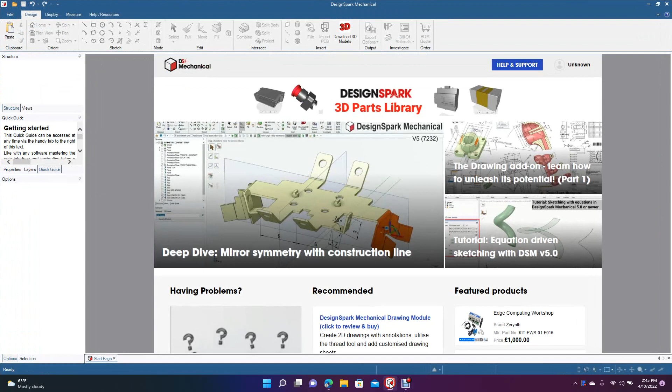Okay, we'll go ahead and open up DesignSpark. We're going to create a new design. You can follow along if you want to make one of these yourself. We're going to go to DesignSpark Options. Going to navigate over to Units, and we're going to make sure this is on millimeters, and it is. So we'll go OK, and then we'll change this to plan view.

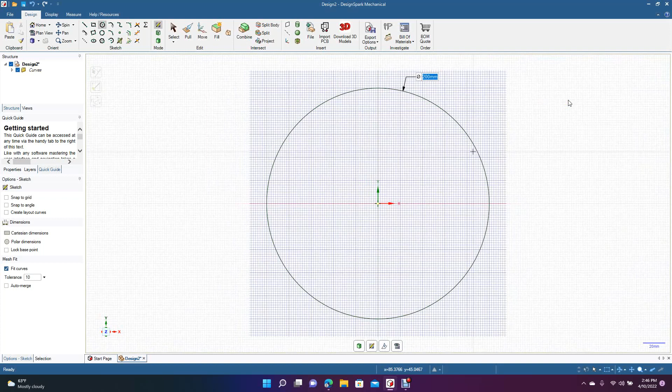I have some basic dimensions on my phone that I will be using. So the first dimension we want to create is a round circle of 200 millimeter. So we're going to go ahead and get our circle tool. We'll drag out and we'll type in 200. Control minus. Alright, it looks like the next dimension for the cylinder in the middle is going to be 78. So we'll go ahead and get the circle tool again, and we'll type in 78.

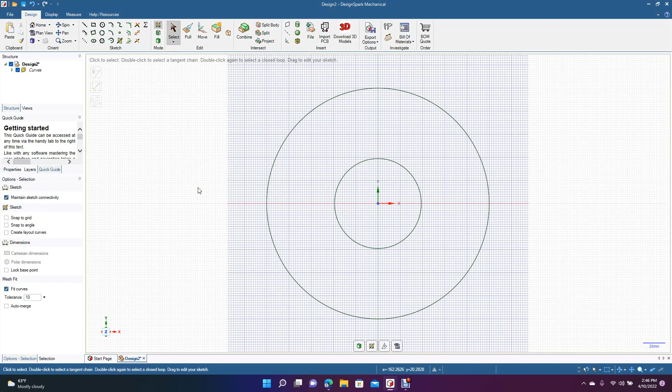Okay. Now we're going to go ahead and put the thickness on there, which is going to be 56. So we'll draw one more cylinder, and we'll type in 56. Okay. So now what we want to do is go ahead and go to the 3D mode. We want to spin this. The dimension in the inside to hold the filament is going to be 64 millimeters.

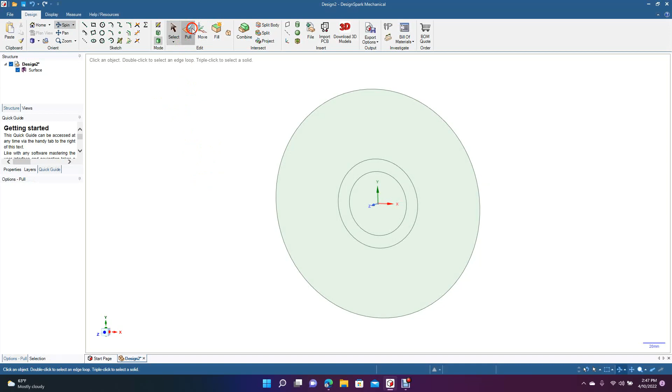So basically, we're going to pull this. Let's see here, how I want to do this. We'll go ahead and move this. So we'll go to move, and then we'll move this and type in 64 millimeters, enter. Okay.

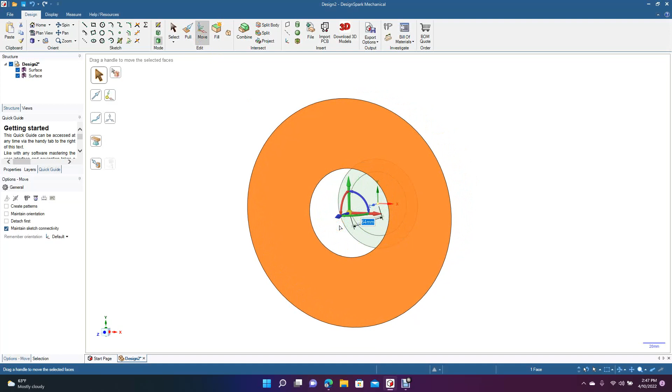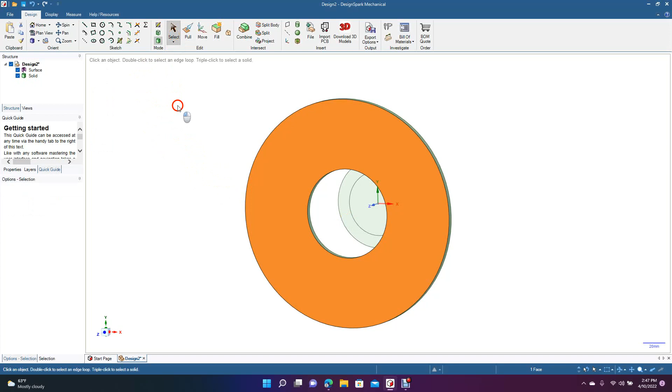Now we're going to add a little bit of thickness to this, so we'll pull, and then we're going to go ahead and add, I think probably 5 millimeters will be good. Okay. Now we're going to go ahead and spin this around. Let's go ahead and get rid of the center one. That's going to be where our filament is.

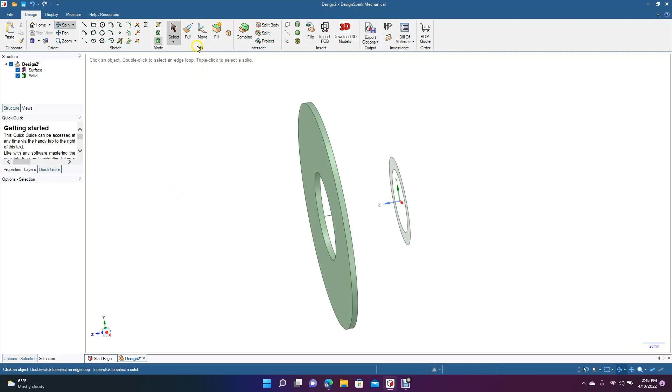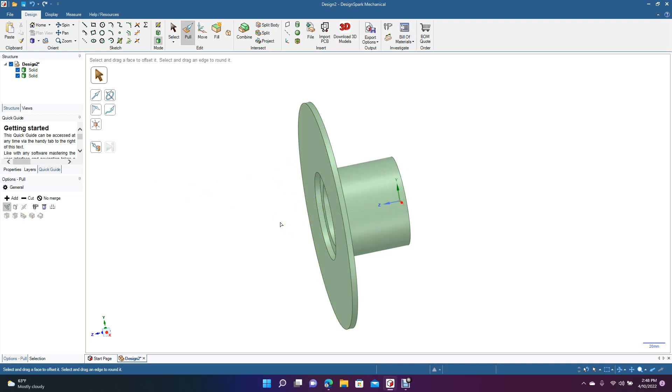Okay, now we're going to go ahead and move this. Actually, we can pull that, so let's go ahead and pull. We're going to select that piece, and we're going to pull to there, or actually up to here. Let's undo that. Go ahead and pull. We'll pull to the point. We'll go up to here. All right. It's going to be our inside of the wheel.

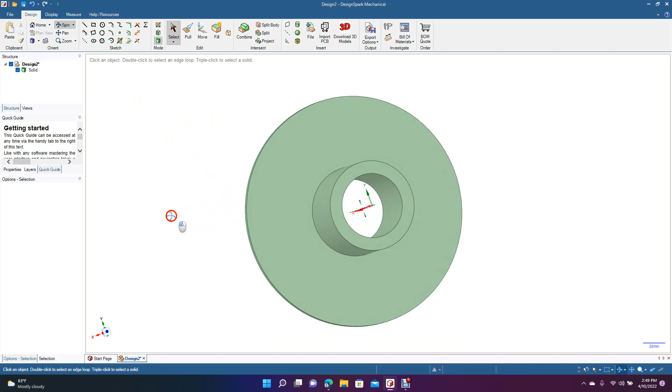Okay, now we're going to go ahead and do the same out here, so we'll select this. Actually, you know what? Let's just spin this around and go ahead and put another piece on there. Go ahead and click that. We'll click here. Go to plan view. We'll grab our circle tool. And we'll type in 200. And we'll go ahead and spin this.

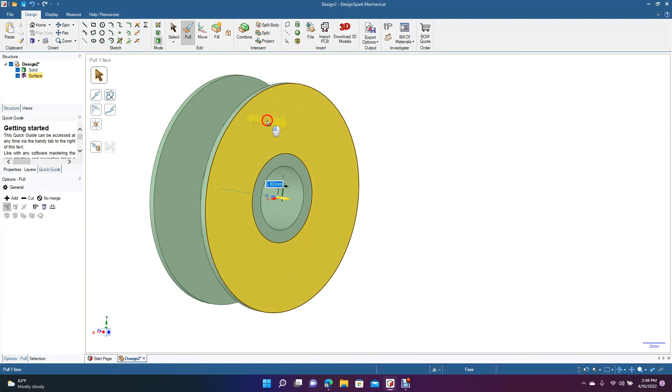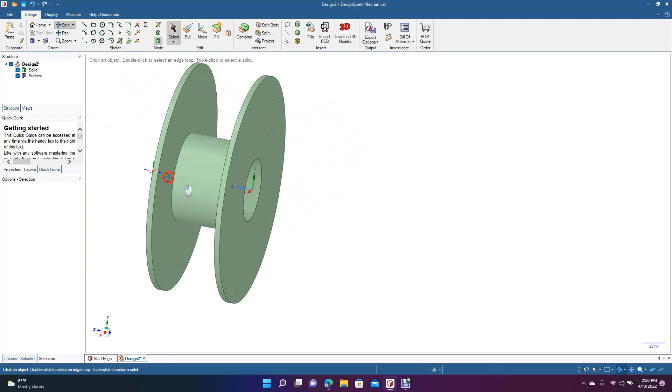Go to pull. And we're going to go ahead and pull this 5 millimeters. So undo, let's click there, type 5. Actually type -5. Okay. So now we have the basic wheel that our filament's going to go onto. So we'll go ahead and spin that around. We'll click this face here and we'll go plan view. And then we're going to pan this over.

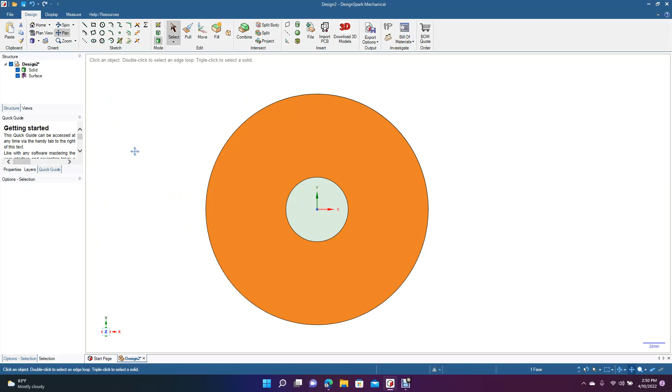Okay, now we're going to put some squares in there, I guess. 1, 2, 3, 4, 5. We'll go ahead and put 5. So let's go ahead and get our line tool. Going to go from the top there to right there. We'll select to click off. Now we're going to go ahead and go right mouse click, set as mirror.

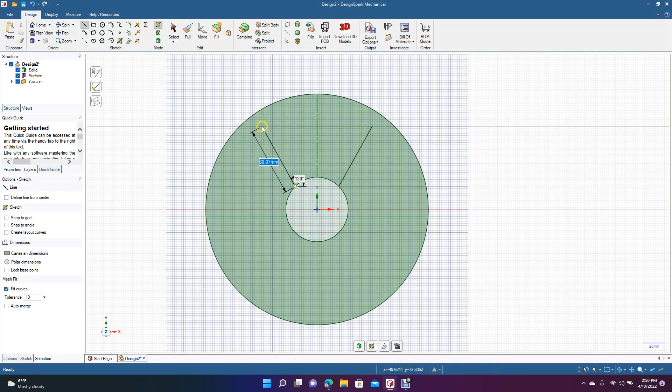Now we're going to go ahead and draw one of these mirrors over here. It's going to be 57.5 millimeters. Let's just make it 57. And then it's going to be 119.3 degrees. So we'll go ahead and click off of it there. Now we're going to grab our offset curve. Click on that line. We're going to come down here. Let's just come all the way down to 17 millimeters. So type in 17.

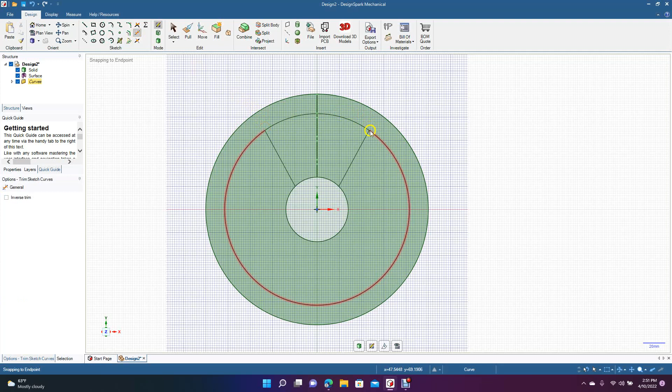Okay. Now we're going to go ahead and get our trim away tool. Let's trim away these little pieces here. Okay, let's get that piece. We don't need that anymore. Now we're going to go ahead and get our create rounded corners. We'll put a fillet in there. 10 millimeter. We'll put one here. 10.

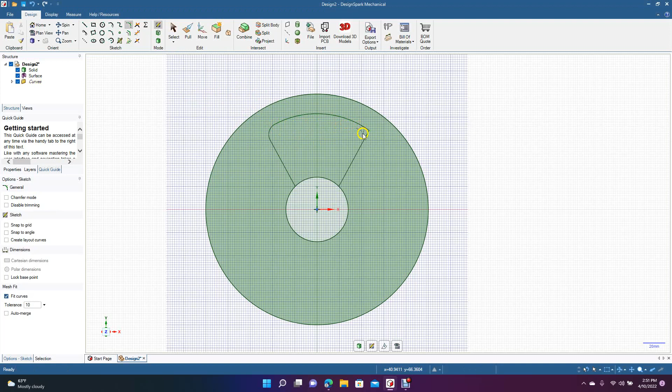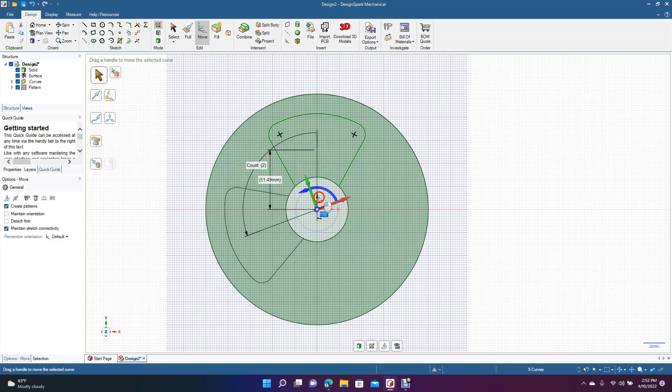Okay, now we're going to go ahead and select these pieces. We're going to click on move, and then we're going to come over here to create pattern. Then we're going to drag this little move tool to the middle, and then we're going to flip this around till we have, we could go up to 4. So we're going to go 4 there.

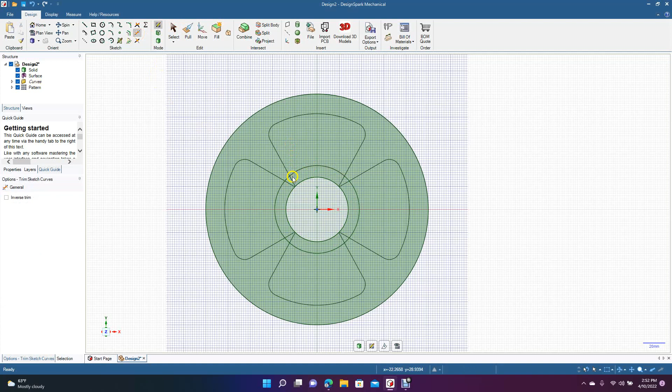Now we're going to go to the offset again. We're going to offset this up. Let's just go ahead and offset it 10 millimeters. All right, let's get our trim away. Trim away all these pieces here that we don't need. Okay, that looks pretty good for the filament holder. Now we're going to go ahead and get our create rounded corners, and we're going to put a little fillet in there. Let's do a 5 millimeter one, and then we'll follow that through on the rest of these.

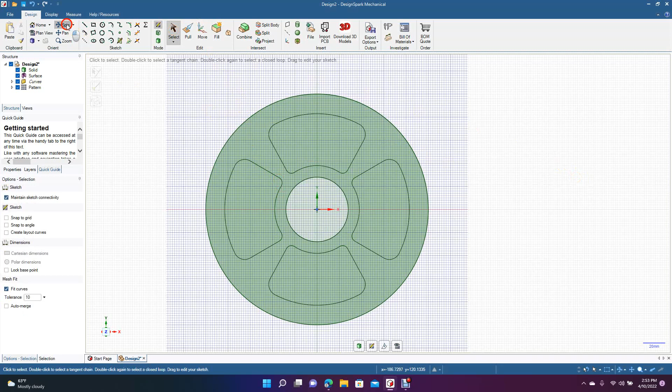Okay, we're almost done here. Okay, this is going to be our basic filament wheel. So now we're going to go ahead and spin this. We need these to be hollow. So we're going to go ahead and pull.

We're going to hold down the control key to select all of these. And then we're going to pull straight back so it goes through. And then we're going to go ahead and spin that. Looks like a decent filament wheel.

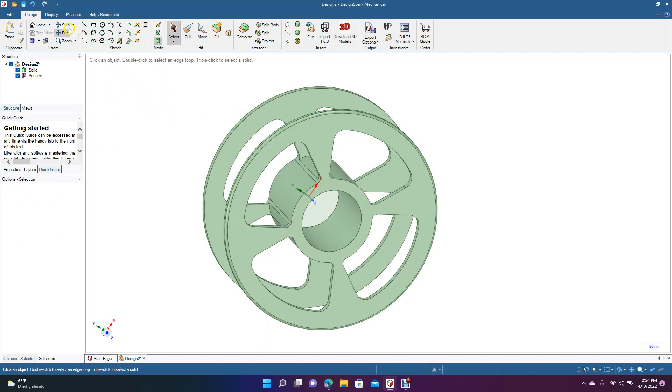Alright, the only other thing we're going to do is go ahead and click the outside there. We're going to add our, let's go undo, let's click that, let's add a 2 millimeter fillet. Okay, we're going to go ahead and spin that around. Let's go ahead and click there and add a 2 millimeter fillet. We're going to keep the insides here flat.

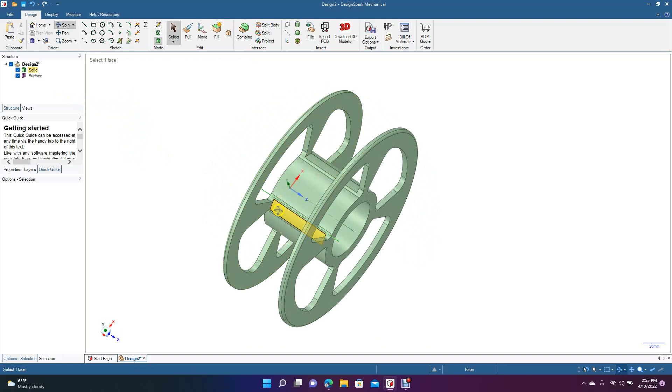The only thing I'm not crazy about is how this got kind of gouged out there. So what we're going to do to fix that, we're going to go ahead and rotate that. We're going to select here, click on plan view. We're going to grab the circle and we're going to come up a little bit to, I think it says 60, I can't really tell what it says. 87, so we'll go 88 millimeters.

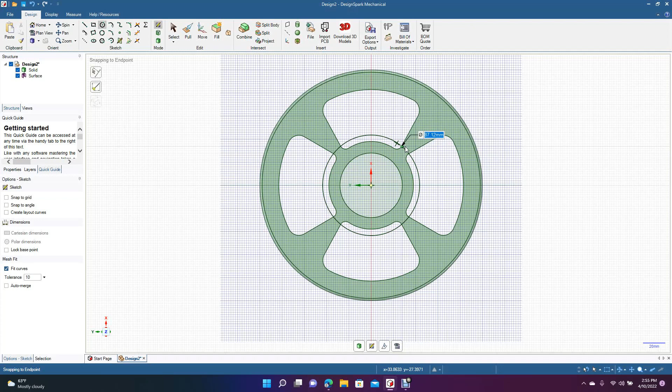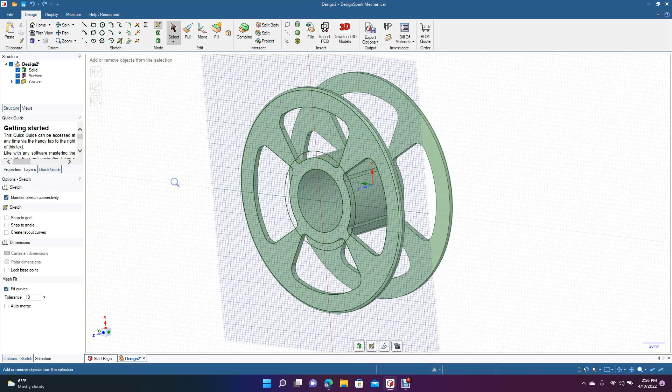Spin this. Now we're going to go ahead and pull. Select these. Pull, let's go up to here. Spin that, make sure that's still got that gouge out of there. So let's just undo that. I'm going to go ahead and keep it like this. Let's go to the 3D mode. Oh, this is good enough. Filament's just going to go inside of there anyways, wrap around.

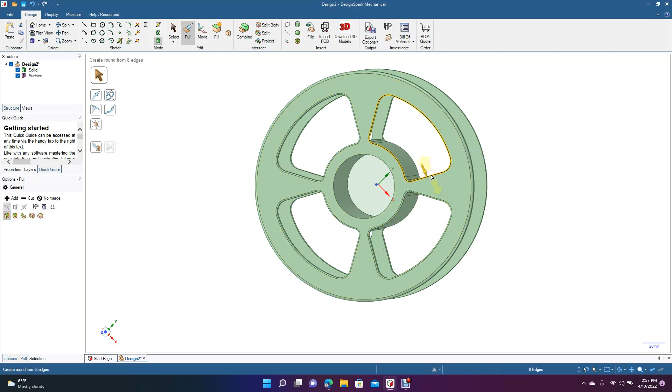Okay, so we added our 2 fillets to the outside. And now what I'm going to do is go ahead and get the pull tool. Click till everything's selected, type 1. We're going to put a 1 millimeter fillet in all this. Type 1. Okay, we'll get the front and the back. Okay. Go ahead and get there. Let's type 2 on that one.

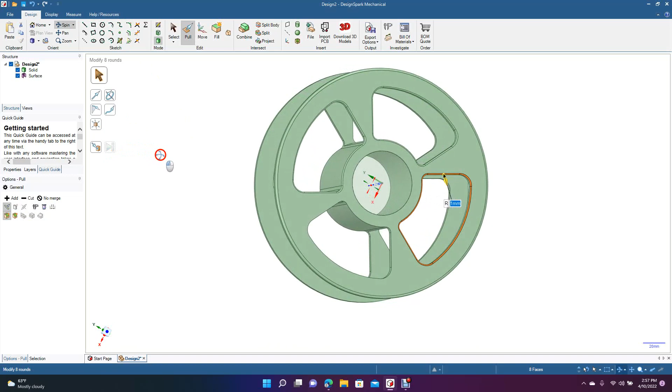Okay, let's spin that around. Let's do the same on here. Pull. Click till everything's selected. Type 1. Do it on the rest of this for 1 millimeter. Okay, this looks like it already has the 1 millimeter on there. Actually, it doesn't, so let's go ahead and pull. Type 1. Let's click this circle here and type 2. Let's go ahead and undo that.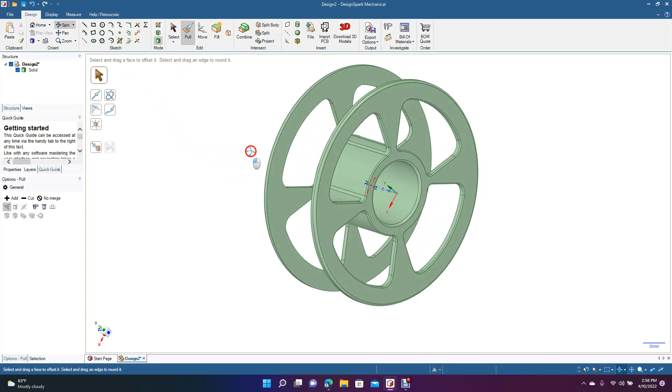Okay, we have a little piece here we need to get rid of, so let's go ahead and get rid of that. Let's pull there, type 1 or 2. Okay, that's better. Spin this around to the back side, that looks pretty good. Okay, that looks like that's going to be good. That's going to end today's tutorial. That's going to be our filament holder.

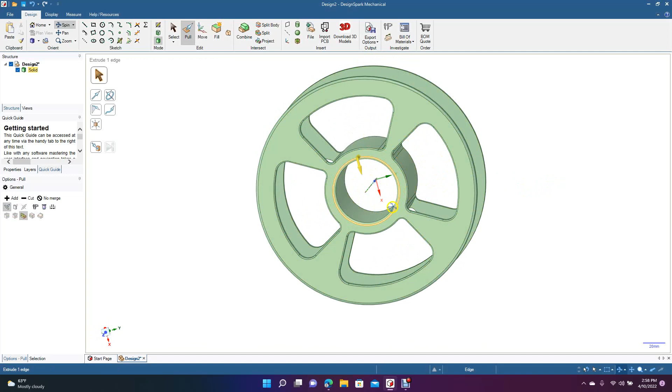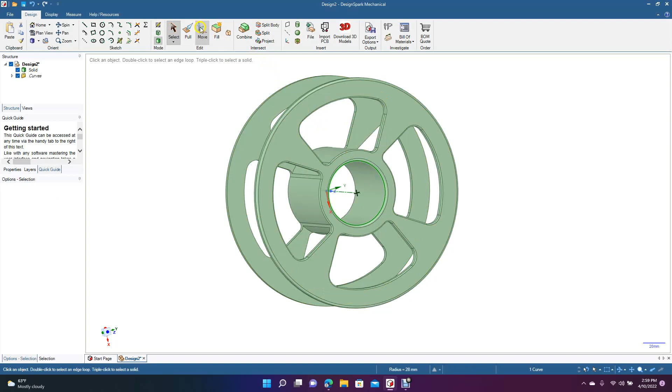What you also could do is create a plug here if you have a smaller hole and you want this to fit in the middle. We can go ahead and create a plug that goes there. So to do that, we just want to click this piece, do a Control-C, Control-V. And then we want to move that, grab the blue arrow, drag that out a little bit. Then we want to fill it.

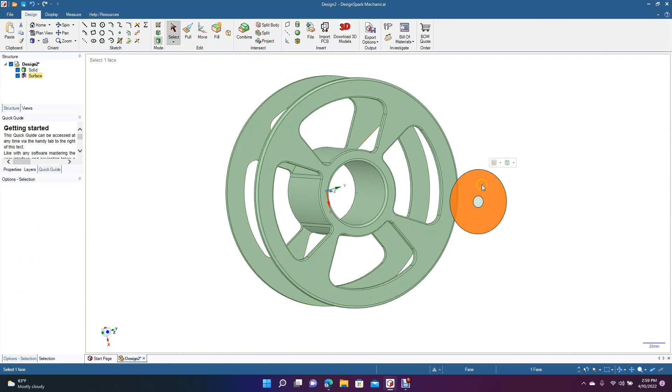And then go ahead and put a smaller circle in there, maybe 10 millimeters. Okay. And then go ahead and go back to your 3D mode. Let's go ahead and give this some thickness. Let's pull. Let's do a 35 millimeter plug there. So that's basically going to fit in there. Then your screw will go right through the middle.

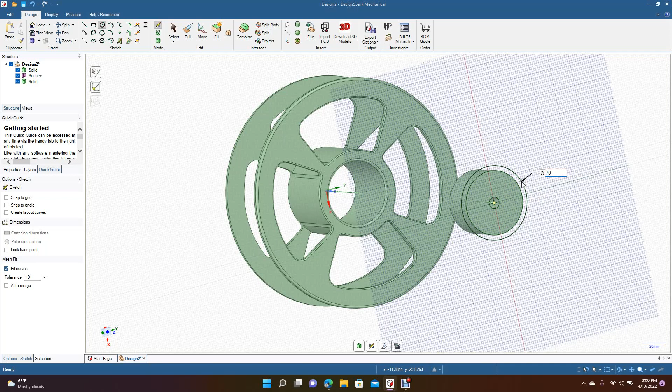So the only other thing I'm going to do is create a little flange, so it's easier to throw that piece in there. So we'll go, I guess we can go 70 millimeters. Okay, go ahead and go to pull. And we're going to select these here. And then we'll go ahead and go 10 millimeter. Okay, let's go ahead and spin this. So this is going to be our plug for here in case we need it.

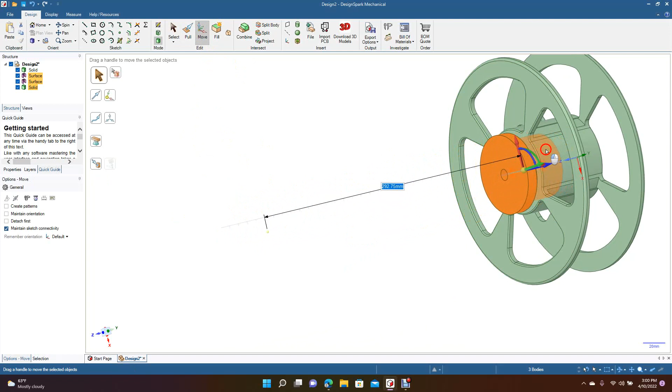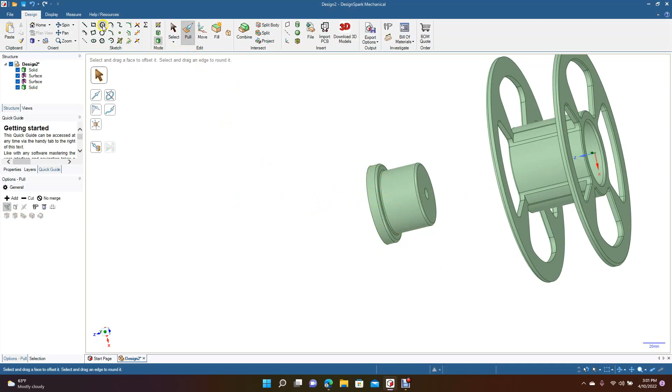So we'll go ahead and select that, go to move, grab the blue. And that will fit in there. And you can adjust the hole here accordingly. So the only other thing I'm going to do is add some fillets to this. Let's go to pull, let's click there. Put a 2 millimeter fillet in. Spin this around. Let's do the same up here. 2. Let's get a piece there, let's do 1. Okay, let's spin this. And the top here, let's do 2. So click on it and type 2.

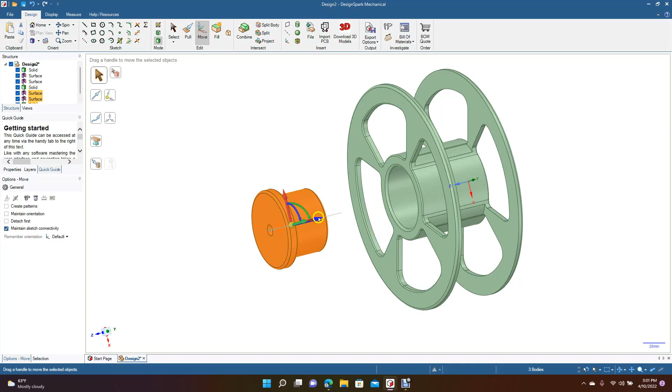Okay, so you got the reel, you have the plug. Now what we're going to do is go ahead and replicate this. We'll make 2 of these. So we're going to copy, Control C, Control V on the keyboard. We'll go move. We'll grab this blue, move it over to here. Now we're going to grab the green and we're going to rotate that around 180 degrees.

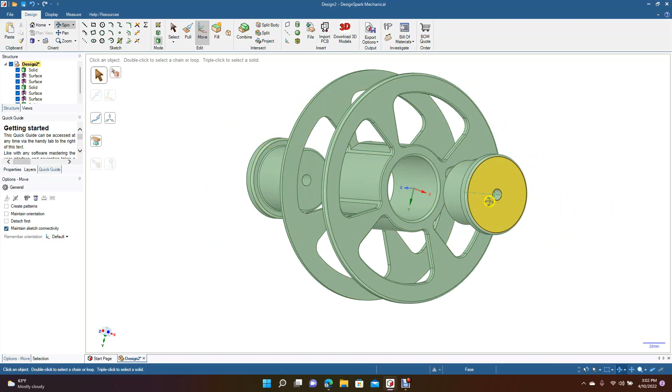Okay, so now we've got our filament holder. So the filament's on the inside. We have these plugs here. Should the pole that needs to go through there be 10 millimeters, you go ahead and fit these in. If it's not 10 millimeters, then you just need to adjust that hole. And that's pretty easy to do.

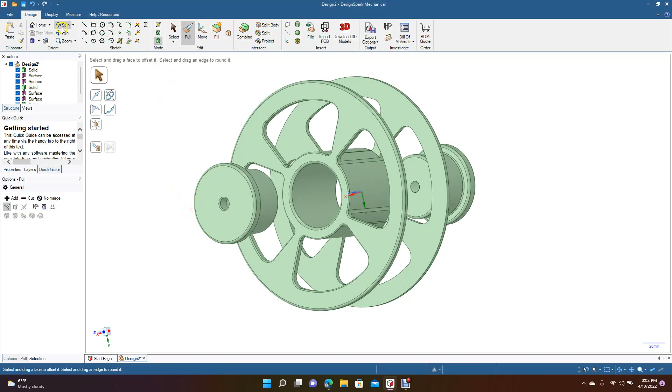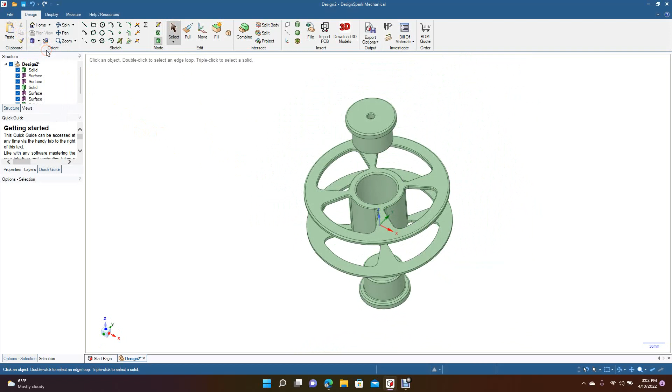So we'll go ahead and do one more thing. We'll put a 1 millimeter fillet on there. I'll go ahead and spin this around. Select pull. And then we'll type 1 millimeter in there. So that's going to finish up our filament reel. Go ahead and go to top view. Maybe view this from isometric. Okay, that's going to be our filament holder.

You could print this out on plastic, print these little caps out, and if you need to use them, you can use them. If you don't, then you can just put the pole through here. Okay, that's going to end today's tutorial.